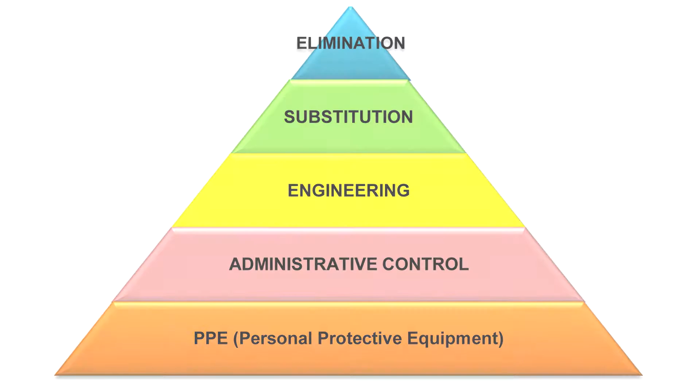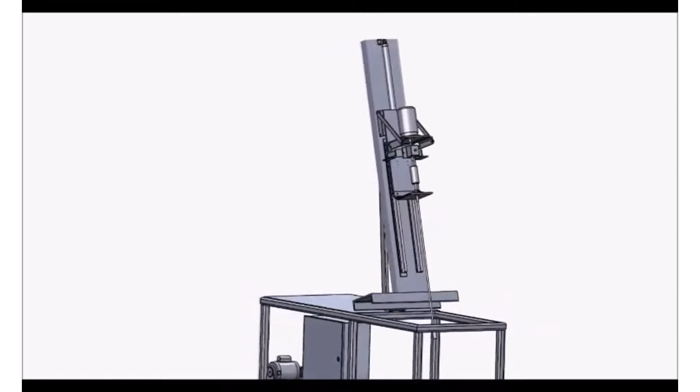The rig features a cantilever design that allows the derrick to lay down horizontally for easy maneuverability. When inclined to the drilling position, the rig has a height of 110 inches. The traveling block is attached to the derrick through pillow block bearings and a linear guide rail which work together to reduce friction. A 250 psi air cylinder is used in a pneumatic system to raise and lower the traveling block, as well as to apply weight on bit which exceeds the gravitational load of the block.

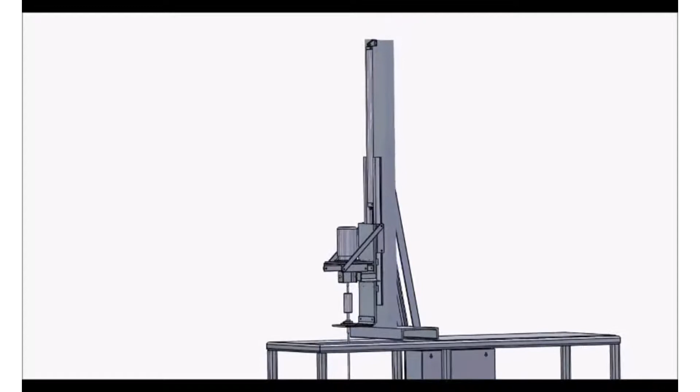The motor, water swivel, torque sensor, RPM sensor, and load cells are housed on the traveling block. The top drive is powered by a 3-phase 1-horsepower AC motor which provides up to 4.5 pound-feet of torque and 1200 RPMs to the drill pipe.

Our drilling rig uses 9 sensors to monitor the drilling process. The first one is the distance sensor. It's based on a laser module and is used to measure the distance traveled by the traveling block during the drilling process. Next is the RPM sensor that is used to measure the RPM of the drilling pipe. A torque sensor to measure the torque produced by the motor on the drill pipe. An axial vibration sensor used to measure the vibrations experienced by the traveling block.

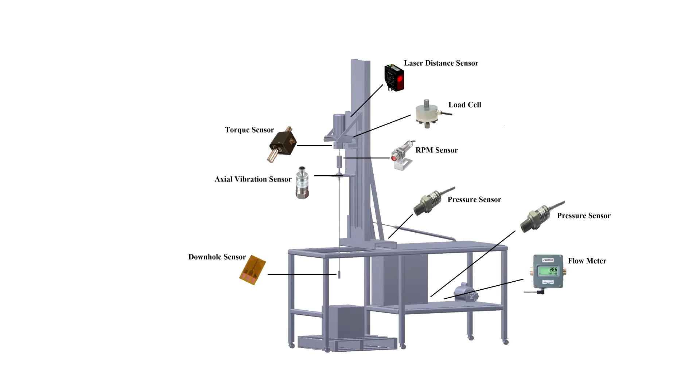A load cell that measures the weight on bit. A pressure sensor to measure the pneumatic pressure of the cylinder that controls the motion of the traveling block. A pressure sensor and flow meter to monitor the mud circulation system, and finally a downhole torque sensor that is designed using strain gauges, and it measures the torque experienced by the drill bit.

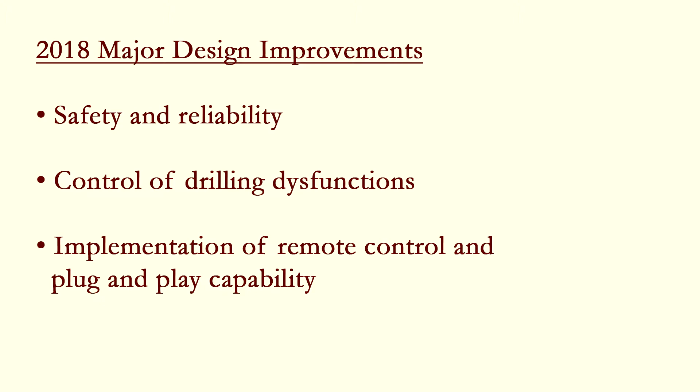The design improvements for this year's rig fall in 3 major categories: safety and reliability, control of drilling dysfunctions, and implementation of remote control and plug-and-play capabilities. Improvements to safety and reliability will include electrical upgrades, such as the separation of low and high voltage wiring and the installation of GFCIs.

Containment of drilling fluids and cuttings will be achieved through the use of a tray, which will collect these materials and divert them towards a drain. Polycarbonate safety shielding will be installed around the rig to prevent flying debris from injuring personnel. Hazard warning signs will be used to alert personnel of danger.

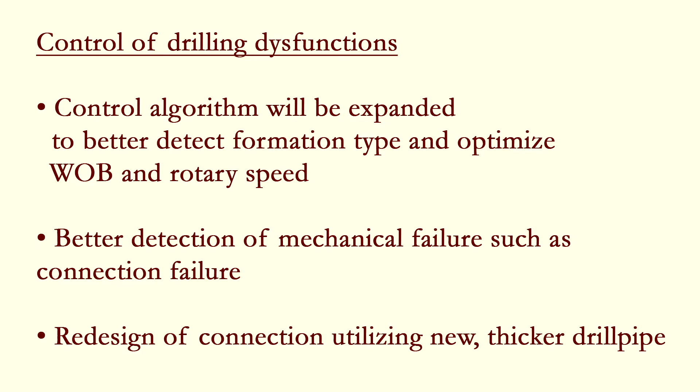Control of drilling dysfunctions will include improvements to the control algorithm, which will be expanded to better detect formation type and optimize the weight on bit and rotary speed based on these determinations. Better detection of mechanical failure, such as connection failure, will be built into the control algorithm. Also, the connection will be redesigned and tested using several different methods and take into account the thicker drill pipe to prevent these connection failures in the first place.

Remote control and plug-and-play capability will be a feature of this year's rig. This will allow for remote control and monitoring by anyone who has a personal computer, an internet connection, and the password for the rig. 3 cameras will be installed to monitor the drilling operation at the drilling site. At least one of these cameras will have pan, tilt, and zoom capabilities.

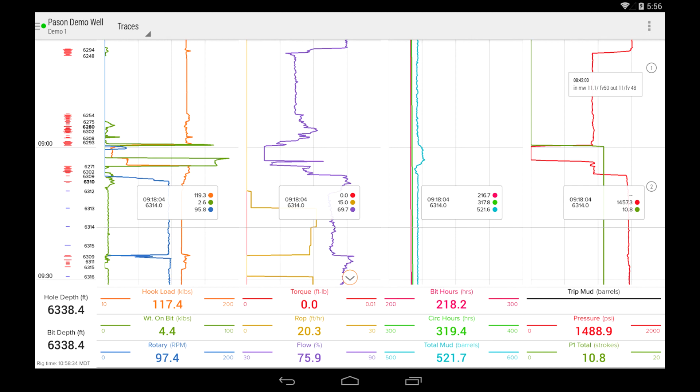On behalf of the University of Oklahoma 2018 Drillbotics team, I'd like to thank you for looking into our design. Complete details can be found in our final design report.